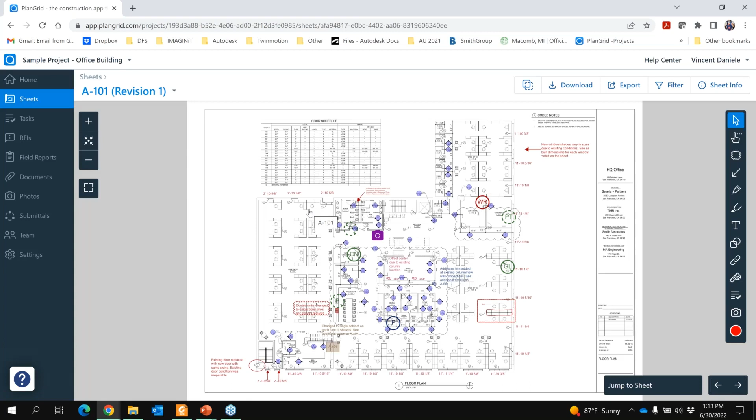I'll click on one of our sheets here. A couple of differences: what you'll see in ACC Build, Autodesk Build, in this environment is very similar—you have a lot of the same markup tools. PlanGrid refers to issues in this area as stamps. These little buttons are just different stamps, which are then sorted as tasks within this project environment. So a lot of the same stuff with stamps is referred to as an issue within Build. But one thing I really want to point out is that you're limited to the references you can attach to a stamp within your sheets.

You can place photos and videos to a specific stamp or task, but you cannot apply other references. Scott's going to highlight within Build the majority of the different options for attaching different types of references to a particular issue or task within a project. That's one of the key features that really drives power behind Build that PlanGrid simply doesn't have.

A lot of the information, even though we might be able to access it through a task within PlanGrid, isn't connected to all of the different parts and references within a project that we can upload.

A lot of the markup tools are really exactly the same—cloud tools, annotation, highlighting different things. And really when you create markups, it's the same process in Build. If you create a markup, if you want to keep it to yourself, you can, or you can choose to publish it to the project so anyone who opens that sheet can see your markups.

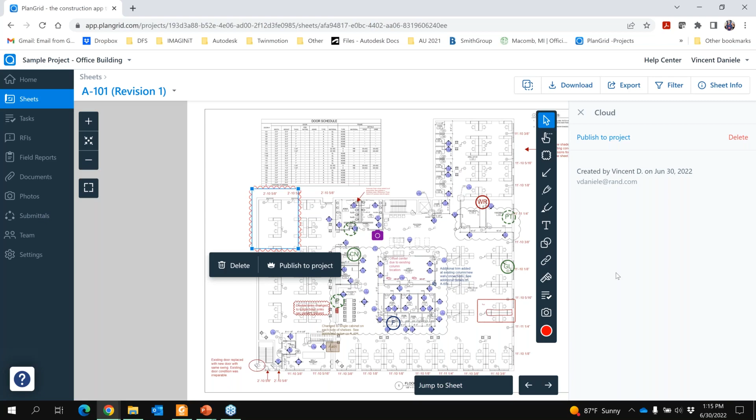Probably one of the issues with both PlanGrid and Build is that you can't group your markups together to an issue. So if your issue is close to a revision cloud, you just assume based on proximity that the markup or annotation relates to the issue you're pinning nearest to it. But PlanGrid doesn't do that any differently—the markups are kept separate from the stamps being placed.

If we take a quick look at the tasks here, jumping from sheets to the actual tasks, this is the equivalent, like I mentioned, to issues within Build. So even though it's a different name, it won't be shocking when you start a Build project—the layout looks the same. It's actually a bit more elegant in Build and easier to understand and create different issue types.

Within tasks, we have all of our tasks created within this project, so we get this overall task list. We can filter based on a few different things, like an ID number, keywords assigned to that stamp, status, who it's assigned to, etc.

We do have actual different stamp types—these are like different issue types you would generate in PlanGrid, again just a different name. You'll see this within Build too, but you can create different stamps pretty easily here. Press S for new stamp and just name it. It essentially creates a different stamp type for your sheets that you can place, so as you're reviewing sheets you know what your standard issue types or stamp types are in PlanGrid. Then you can create different root causes.

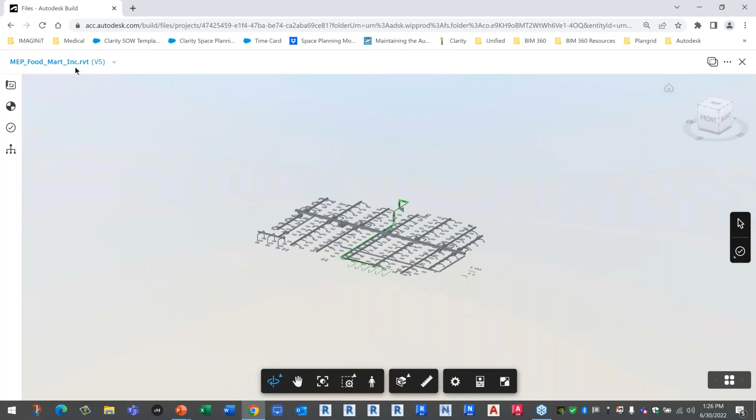Also, this is a universal viewer. I can open up Word files, I can open Docs files, I can open up MicroStation files, Navisworks files, I can open up a Revit model and have full access to the model on the PC or even in the field. I can go to the different sheets in the model if I need to.

So I have access to this - I don't have to transfer it to PDF. I can even then take the Revit model here, select it, and directly turn it into the sheets, which are one of the main parts of Build for managing your sheets, right?

And when I go to the settings for sheets, I have a full permission control here too. There's so little permission control, it's almost all or nothing in PlanGrid, where here I can be very explicit. I'm going to let everyone view the sheets because everyone has to view the sheets, but they could go further

higher up and say, hey, this company could have more control or less control, and again, base that on a company, the name of someone, or just base that on a role. I could say project managers. So project engineers, project managers as a role might have a higher level of access to this folder. As you can see, now I have username, company, role, lots of permission control. So if anything, that's one of the most important improvements I think over PlanGrid.

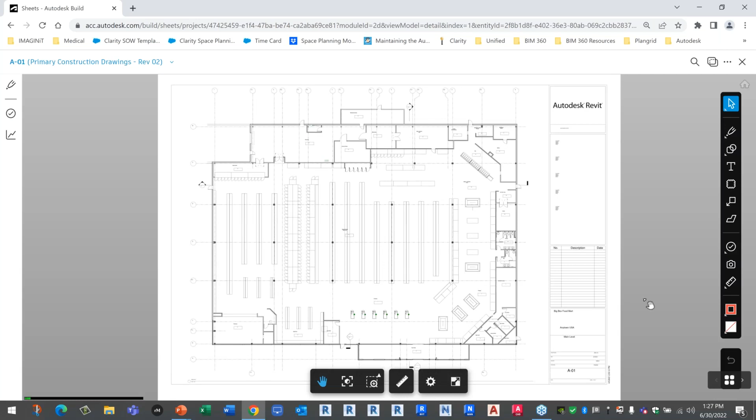Otherwise, everything kind of works the same. I mean, you have your sheets, you import them the same way. It's almost the same functions. There's very little learning or transition training that is even needed here. But one thing that's also important here is that everything's consistent. They use two different names for the same things in PlanGrid, stamps, tasks. No, they're just issues right here.

This is an issue. I type in a design issue. I place my design marker, my design issue right there. It's still an issue. Now, issues here are not necessarily a problem. Look at them as action items. Even tasks don't describe it right. So this means it could be a good thing. It could be just a request for someone to do things. I have all the same settings that you might see in PlanGrid, but now I have even more.

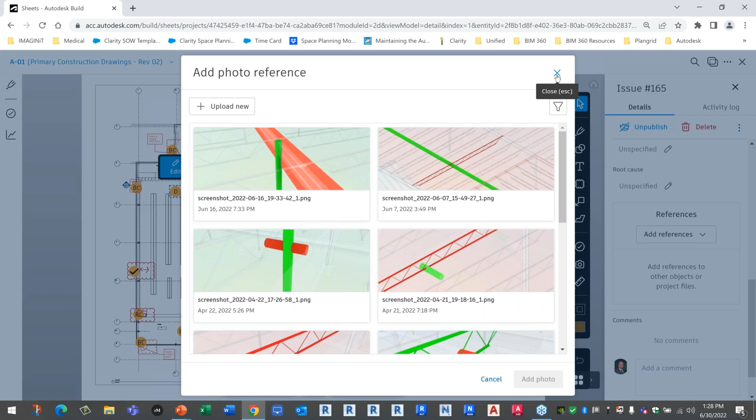I can get down here and I can take an issue that's on a drawing and directly connect it to any photo, either uploading a new one or just use the photos that are in the system and attach ones that I've already uploaded. I can attach an issue to a file, to a schedule item, to an RFI, to an asset, to a form, to a submittal, to a potential change order directly.

If I go to RFIs, I can connect this issue directly to an RFI or create a brand new RFI right here. So this is huge, the connectivity, that everything can be connected here. I can attach it to an asset. Maybe this issue is related to a VAV box, and I attach it to that, and I add that asset to it. Or maybe this issue is an instruction for someone to fill out a punch list in this room.

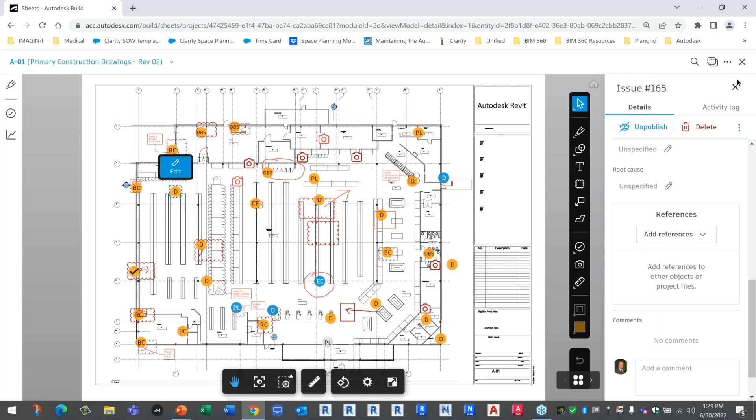I could connect that to what we call forms here, which is the same as the reports, and I might have a daily report, a daily safety inspection, a carpentry punch list that has to be done, or create a brand new form from my library of available forms for this project. So again, huge advantages of the complete interconnectedness, if that's even a word, for all the things in the system.

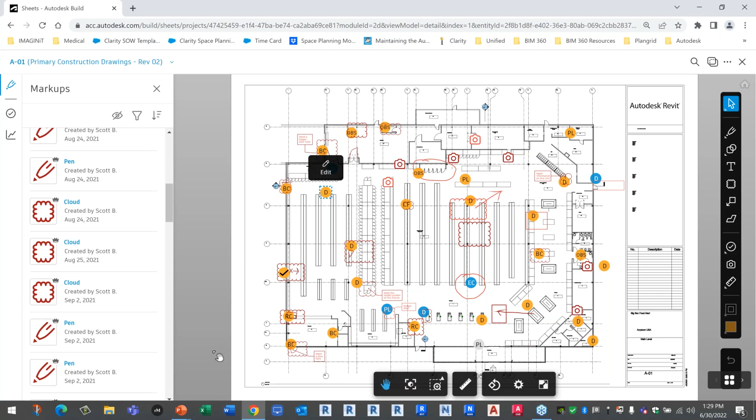And even the fact that I can list easily here. Here are all the issues that are on this sheet. Here are all the markups that are on the sheet, who did them, when they were done. Select the markup, and it would basically zoom in on the markup when I go to these different pieces on this particular drawing. So again, huge advantage there.

But then we look at the RFI process here. So much more control, much more streamlined process. Again, when I go into Build and I want to create an RFI, it's one click. All I have to do is say create RFI, and that's it. In PlanGrid, there are like 6 different steps I feel like you have to go through. Well, here I just answer the questions.

Is it open? What RFI number it is, give the RFI a title, what workflow, because now I have options of a single reviewer or a double reviewer workflow, which person is allowed to review this, as 2 people I can select that are in that role. I can have co-reviewers to allow people to help with the review. I can set a location; this RFI might be related to somewhere. I have a question, a suggested answer.

And again, this is the best thing about Build, the fact that I can connect the RFI to a file, to a sheet, to a photo, to a potential change order, an asset, submittal, form, right from here. So I don't have to create these things first. I don't have to upload new files. I can attach a photo, upload a new one, or use the photos that are already in the system.

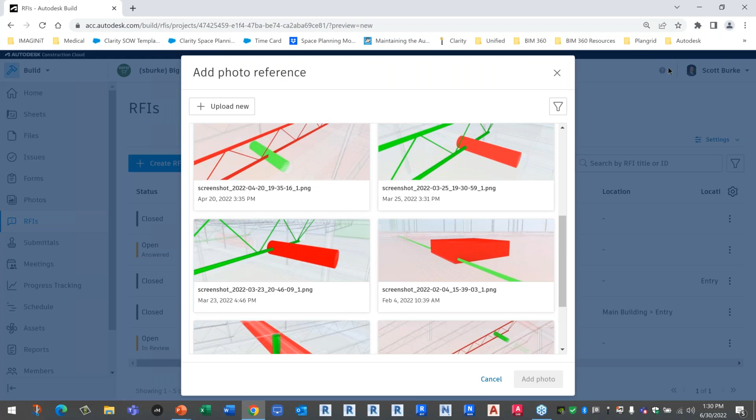So again, this interconnectivity is one of the strongest things within this product. And I just create it and it's done, it's created. And then I can see an RFI here, this one's answered. So this is an answered one. We see the steps, submitted, reviewed. This is in the answered or approved. So now the manager has to go through here and close and distribute the RFI or return it.

All the information is right here. Issues that are assigned to this RFI, sheets that are assigned to the RFI, files, a spec is assigned to this RFI, all from this one little dialog box here. Or down here, this one's in review. You can see the stage it's in right here. The reviewer is Sam Smith. He is the one responsible for submitting this particular review.

He could come in here, submit his official response, put the response in there, mark this as answered, and then submit it. So we always know what stage things are in. We have all the data. Everything about it is in one single place. So that, again, that's that strength in this product here. Same with submittals. Much, much more streamlined, much fewer steps to create those submittals here.

So again, when I go to submittals, the only thing I have to do is, I would preset what spec sections I want to have in here. Or I can just go right to items, create a submittal item, create a whole new spec section, or pick a spec section that already exists, give it a title, give it a description. If I want to, I can include it in a package or not. Packages are not even required.

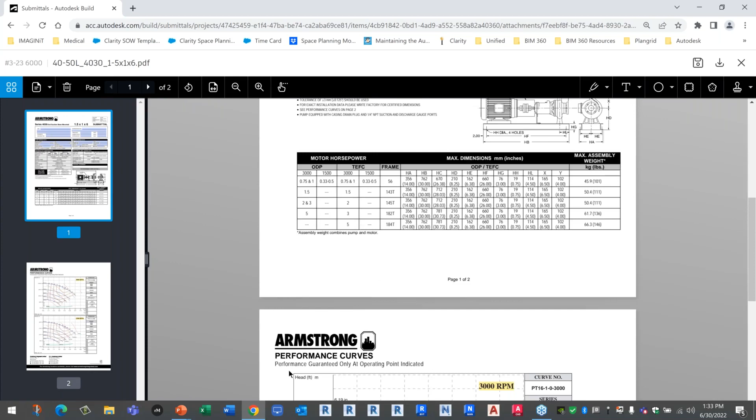So now the person who's going to be reviewing this is going to open the document, the shop drawing, they can review that, or whatever this information is that they need to review. They can come in here and they could mark it up. So maybe they need to say, hey, this needs to be fixed, they have a question about that, whatever they want to do, right? Mark it up. And then when you're done, if it's good, I could create a stamp. I could either upload a standard image that I have or create a stamp.

Okay, what type of stamp do I want? Oh, this looks like an approved as noted stamp, sure. Looks good, but see my comments, the color, create the stamp. Now I can stamp this drawing as approved or rejected or whatever you basically want to do. And then I can come in here and take that stamp, place it on the drawing. I can control its size, any size I want there, place it somewhere on the drawing that won't interfere with something, whatever. And then I would save this, and this becomes another copy of the drawing.

So there's the original, and then there's the copy here that I already have done right there. See, this is the same drawing, but this is the one that is included as the official response, because this is the one that I've already reviewed and I've stamped already. And then that gets reviewed. You create your official response, approved as noted, revise it and create a revision. These are the documents I'm including as the official response.

Incredibly streamlined process here. So easy to go through this. It walks you through the steps. And then I could look at a closed one right here. This one, here's the official response. There's the approved document. Here's the history of the RFI. It's all here, and it's all at my fingertips, and it's a very streamlined process.

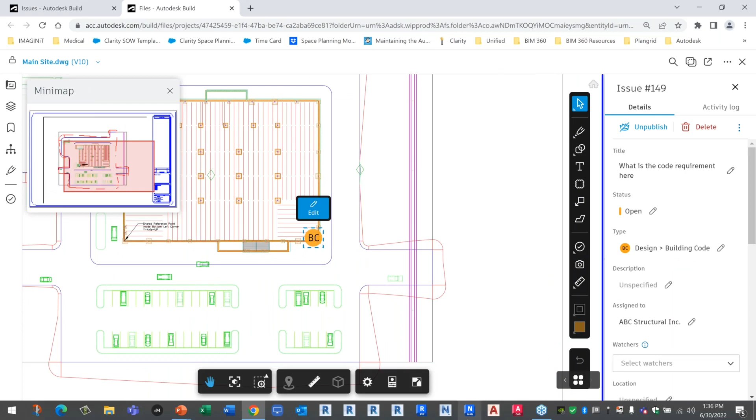And it takes me to, in this case, an AutoCAD file, and to the issue in that AutoCAD file right there. Zooms in right to it. And this is actually in files, not even sheets. Or this could be a sheet issue or whatever. So again, that's another really huge advantage here, that integratedness of everything.

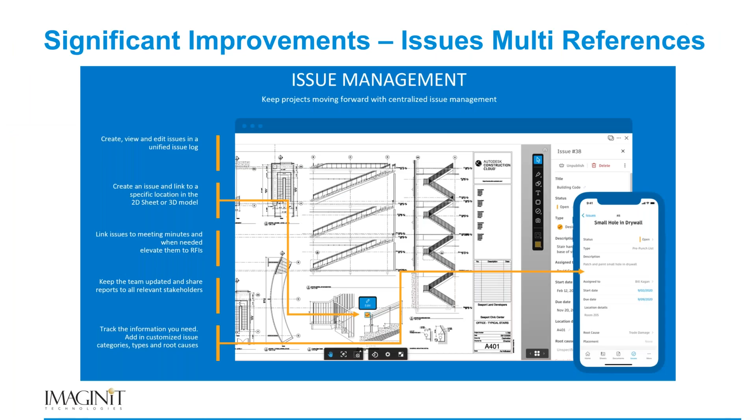And then we start looking into all the new features, document reviews, meeting minutes, all of these things. So I can jump in here. So if I go over to just Docs, jump into the Docs area, I can place documents through a review process where I have a document here. This one started, and what stage is it? It's in the initiator, and it's waiting for this person to review a document and then submit their review.

I have other ones that might have multiple steps in those. This one's open, and again, it's waiting for someone to finish their review. Look at one of these other ones here. This review is closed. This is the document. It's been approved. There's comments in here. I can take a look at the comments there from the different people who are participating in this specific review.

So I have completely new tools that just don't even exist inside of the PlanGrid environment that, of course, are in Build. Then I could move into the next area here, which are the meeting minutes. And in the meeting minutes, there's a whole mechanism now to manage all your meetings, all the items in the meetings, invite people who attended the meetings, what items were discussed. You can attach the items within the meetings themselves to other individuals.

So I can come in here and have a meeting. I can have a series of meetings in here, like my site work preparations meeting. There's been 3 meetings so far, 1 meeting that hasn't happened yet. When I go into those meetings, I have the people who were attending that meeting right here, the organizer of the meeting. This is marked as minutes. I can print this out.

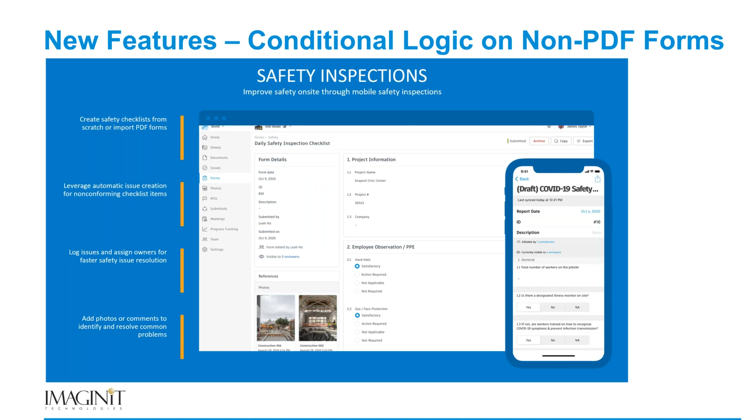And or I can attach the form itself to an asset and say, this form needs to be filled out for this VAV box, right? Or this piece of equipment or whatever it is. So that's, again, one of the other huge advantages here.

Scheduling. So this is not a scheduling tool per se. What this allows you to do is upload your Microsoft Project or Primavera schedules, and now you can share the schedule with the entire team. Anyone can come to the web page here.

Here's the latest schedule. If you have those types of permissions, you have the ability to go into a suggestion mode, to pick a particular item in the schedule and say, hey, this one right here, I need to suggest that there's going to be a change. So I can go in and say, this particular item needs to be changed. There's a delay going on here. So I'm basically in a suggestion mode, and I can say, hey, I need to delay this.

And then I need to say, is there a cost impact? Yes. The root cause of the delay is there's a code compliance issue. Come in here and enter in that data and add that in. And then I can review that. This is what I'm suggesting to the manager, and I'm going to submit it to the manager. And he's going to see that delay.

So as a manager, I can review any suggestions to any of my schedule items. I look at that. I agree that that should be changed. I will mark this as allowed first, and that will let that person know that I've allowed the change. Then I will open Microsoft Project, adjust the schedule, upload a new one, and then come in here. I mark it as completed, and I can even add a note there. And then that person gets notified that I've agreed to your change, and now I've just updated the schedule.

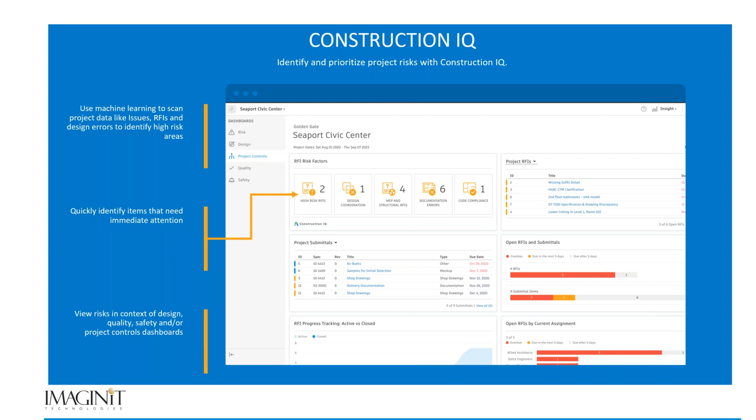All the issues for this contractor that are past due, all the issues that are due this week, all the issues that are assigned to them this month, and so on. Issues, RFIs, whatever you want. Create my own dashboards for my project so I can see, does this project have any risk associated with it? Do we have a lot of issues that are unanswered? I have executive dashboards where an executive can come in here and see the issues across all my projects in one place and see if attention needs to be drawn to a specific project that is having issues.

There's also a data connector that I can download all the data and have that data dumped somewhere. I can download that and then connect it to Power BI and even put those Power BI dashboards on my dashboards within the system. Autodesk even provides a lot of templates now, which is a new feature for those dashboards. So if I go to reports here real quickly, these are reports that I've already run. Here are my templates. Here's my all issue report right here, all open issues.

And this one here has been filtered and scheduled to show all the open issues, and it's being sent specifically to my MEP subcontractor. And if I edit the schedule, it's being sent every Monday and Friday at 5 a.m. So this is being sent out automatically, weekly, to these two individuals, and I could also type in email addresses of anyone else that's not even in the system, and they would receive those PDF reports.

The report itself, I have filtered it to be a status of open and only those issues that are assigned to the MEP installers. And then I could come in here and set up a date range. This is just open issues. I could set up other ones and show anything that's past due if that's what I want to do. I can include a cover page, a table of contents, custom fields, and comments that are in these things will be included in the report.